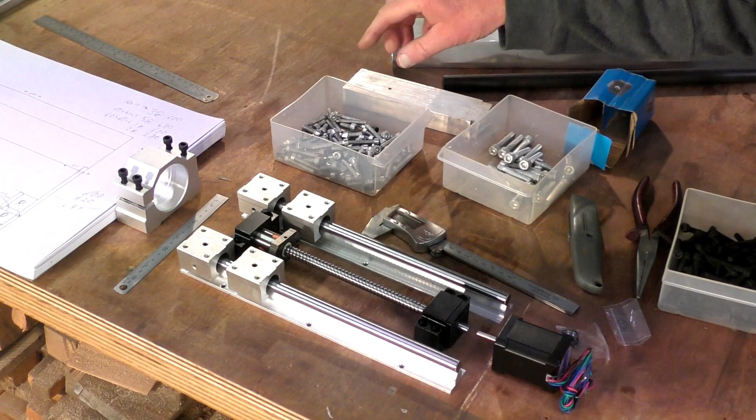Hello there, I've made a bit of a start on the MIDI, which stands for mid-size, mid-duty CNC router. And what I've actually done is I've laid some parts out here. So this particular set of parts is for the Z-axis.

So what I had to work out was what was the clearance that was necessary between these bearing carriages and this bearing block, and how much area I had to create around this to make it work without anything fouling, which gives me the distance between the outer part of the rail here and the outer part of the rail here, and how much room I've got on the aluminium plate material that I picked up yesterday.

It is 160 millimeters. So I'm going to set this top edge to the top edge of that aluminium plate, and with the clearance that I have here, it gives me just a little over 30 millimeters here. So it gives me an area where I can make a solid attachment between the left side and the right side of the CNC router, because I'm having a drive screw on both sides of the Y-axis.

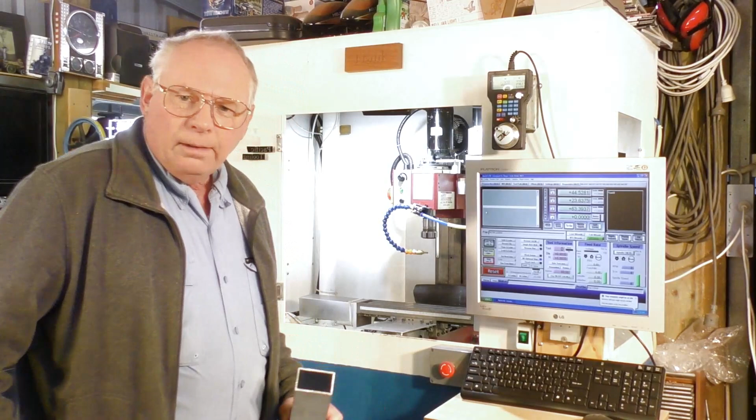Right, so I've cleaned all the ends of these up and I've cut all those short lengths of 20mm bright mild steel. Now all I've got to do is write a small program to cut this 20mm hole with my little CNC mill that I converted about 3 years ago, and there's some 15 videos on how I converted this from a manual mill to a CNC mill in every detail.

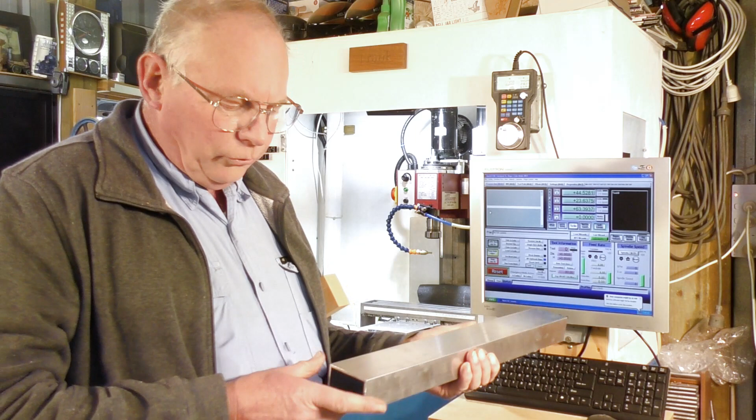So what I'm going to do, like I say, I'm going to write a short little program of how to machine the hole in here. I'm going to cut it with probably a 6mm 2 flute for this little job, for a number of reasons. I don't have to put so much downward pressure on the bit to get it to bite in and cut.

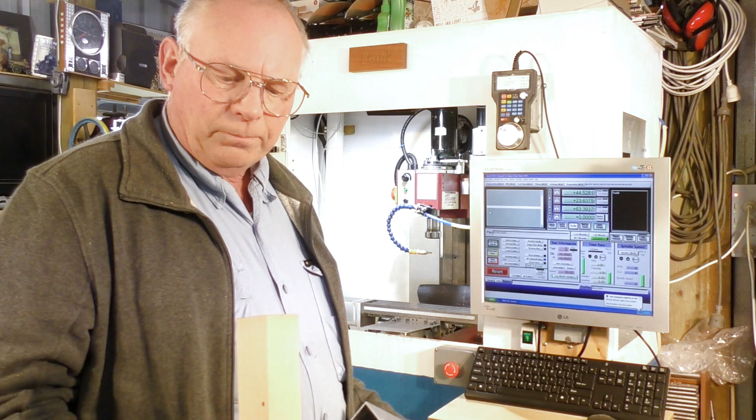And because this is a 3mm wall, what I've actually done is I've cut a piece of, what is this? I know it's wood. This is actually a piece of Oregon. Beautiful. It smells a little bit like oranges. Okay, so I've cut it the exact same size as this, so I just fit it in there like that.

Okay, now I'm going to make a jig. Now a jig is anything that you set up to do, you know, sort of repetitive work. So you just put it into the same place all the time. So it's a tool to help you do that.

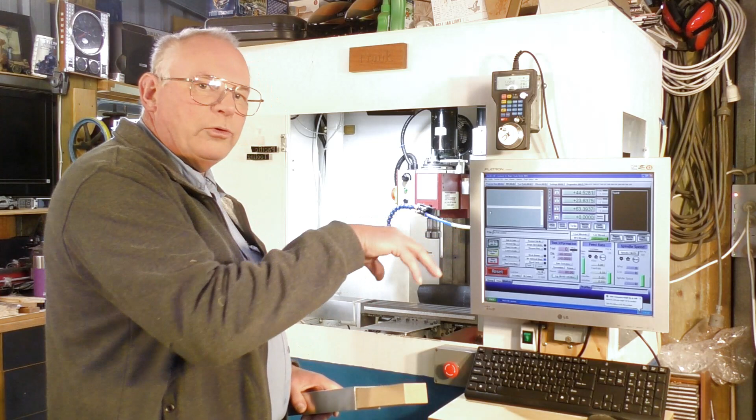Okay, so I put this in here, so when I've got this clamped onto the bed and the tool comes down in, it doesn't crush this down. It's got some resistance. Being aluminium, it will tend to bow slightly. So you put something in here like this to stop that bowing. The tool will bite in and cut the hole through, no problem at all.

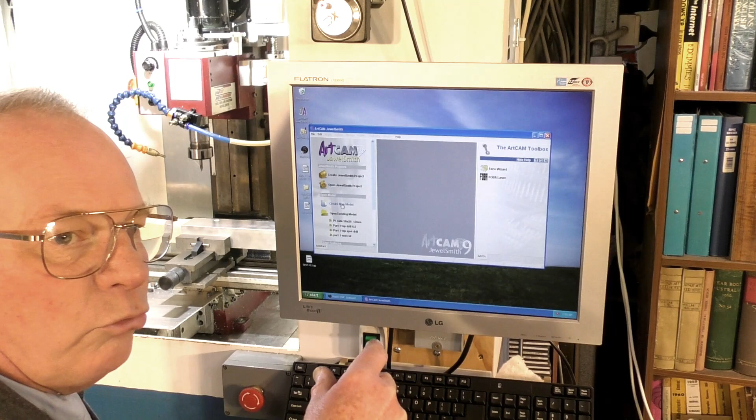That's the idea anyway. Okay, so now it comes down to writing the program in ArtCAM. Now, this is a program I started off with way back in 2008, I think it was, and it's still a good program. And the computer that is running this machine is an XP, actually, that I've revamped, I suppose, and it works perfectly. So we're going to start off with a new job,

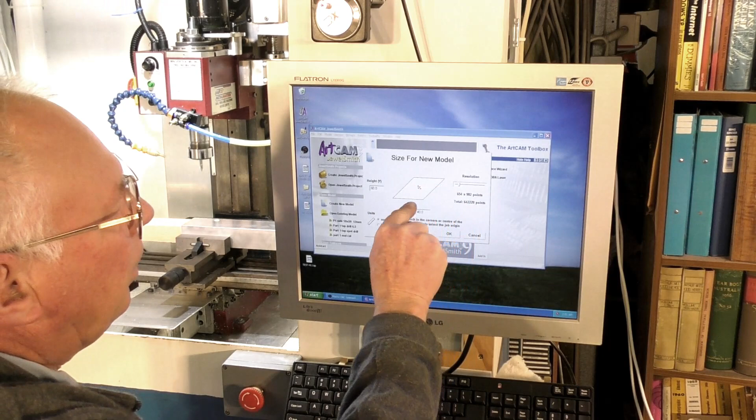and in our case it's going to be, in the Y it's 60mm, and in the X it's going to be 40mm. Now why I've chosen that is because I just want to work on the very end and I require a hole to be in the middle of this piece of work.

So let me just get the piece of material. So I want to put a mill hole just there like that. And the center of that hole is 20mm in from the end. Okay, so I'm actually tricking the program into thinking that this is the full size of the piece of material, because we're really interested in making that hole there.

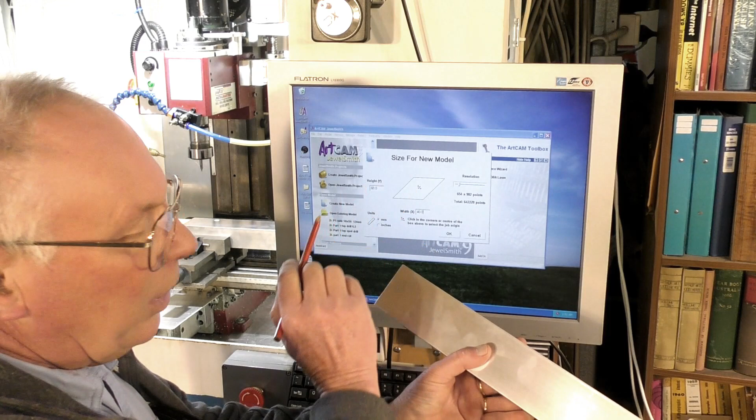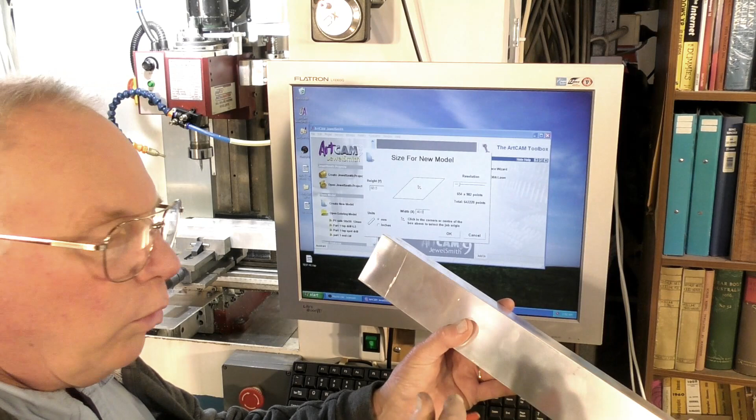Now the orientation at the moment is in the center of the material there. Well, I'm going to put it over here, this back corner, because the vice jaw is here, and I'm lining this corner up here with the end of the vice jaw, so I can reproduce the position of the material very easily. You'll get to know what I mean when we start machining.

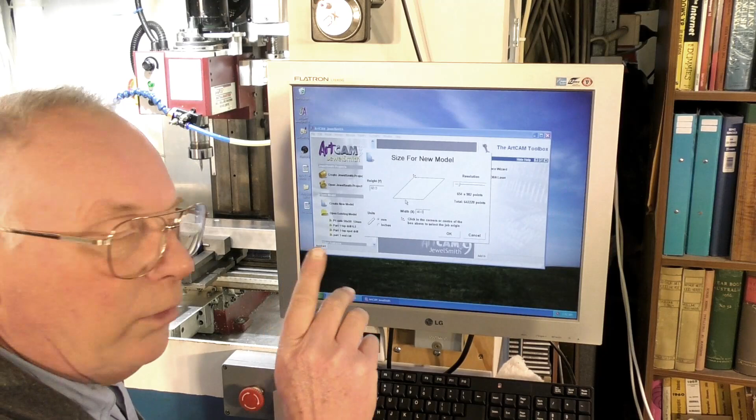So we're going to alter this to the back corner over here, which is pretty normal for a CNC mill. CNC router, you either use this front corner here or the center. CNC mill, it's back corner over there. You can put it anywhere really, but that's what is normal for a CNC mill.

So I'm going to zoom you into full screen, or as big as I can get, so you can see what I do to write the program. Whatever's missing off the screen down here doesn't really matter. Okay, so there is our material. So we're going to come here to the drawing tools, pick a circle,

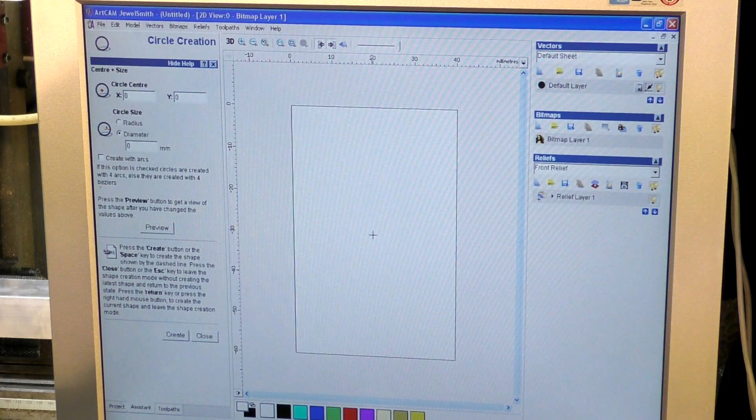and we are going to say that we want a circle of, now I can actually use the wizard here to do this, so it's exactly right. Diameter, we need it to be 20mm. Ooh, not that many. 20mm. And we need this to be, let me see, if we put the 0, 0 here, we need to be minus 30, oh no, there we go, minus 30

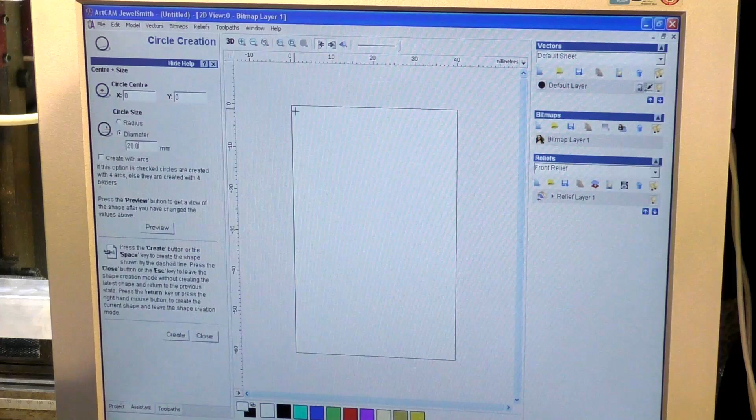and plus 20. So that's what we're going to say here. This is plus 20. And this one minus 30. Preview. And now that's how to use the wizard to help you accurately position a hole or whatever you want to do.

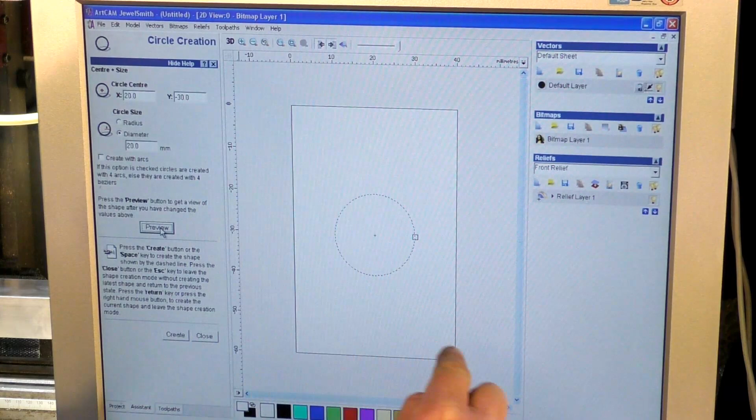Now that is dead in the center of that material. I didn't have to draw it or anything like that. So we're going to say create and close.

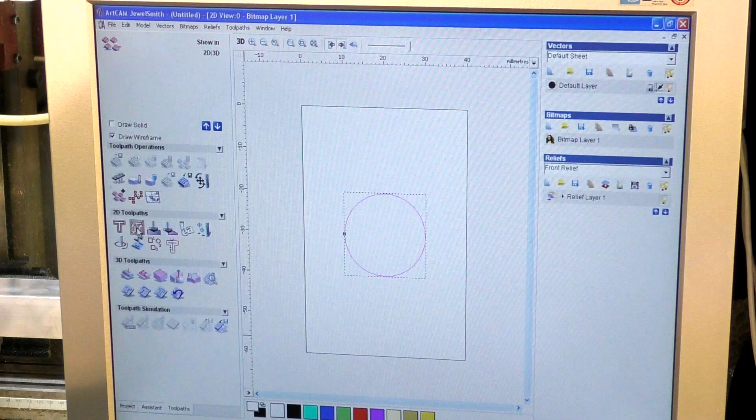Okay, so now we're going to create a toolpath. Make sure we've got our hole selected, and we come down here to toolpaths, and we just want a simple area clearance. So it's a 2D area clearance, start depth 0, and we're going to make the 0 the top of the material, which is fine. Finish depth, we're going to go 4mm, I think, yeah, 4mm. We're not worried about allowance or final tool allowance or anything like that.

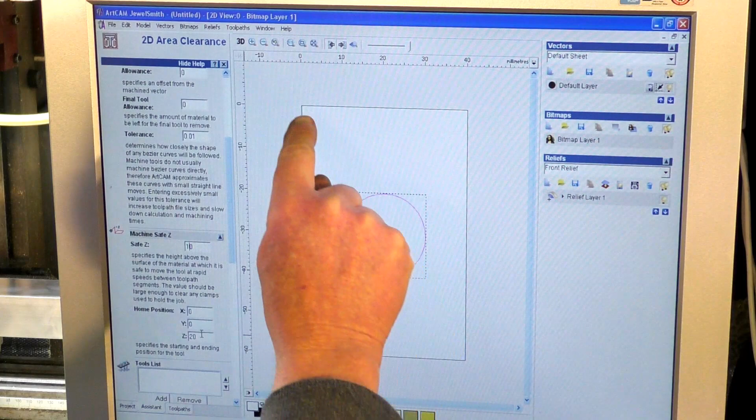Machine safe, oh, that's probably a little bit too much. We can go 10 mil here. Home position Z. Okay, so that means the machine's going to go back to this corner here, which I wanted out the way because I want to be able to undo the vise, take this out, turn it over without having to muck around trying to get it underneath the tool if it was in the middle here. So this is correct for our home position. 20 mil out the way. Safe, yeah, that'll be fine.

Tool list. Add a tool. 6mm end mill. And we're going to select that. Now we're going to modify this now to suit us. 1.8. It's probably okay. I'm going to go 1.5. I'll say 1.5. I don't want to put it under any stress. Step over, step down. Oh, that's way too much. So we're going to go, I think 0.75 is fine.

Feed rate 20 millimeters per second. Yeah, I'll run with that because I can slow it up in Mach3. Plunge rate 6 millimeters a second. I'll say 5. 15,000 RPM? No. I know the maximum on this is about 4,000 RPM. Although, look, the program is not actually controlling this on this machine. I control it manually, but just for practice sake, we'll put the correct information in here.

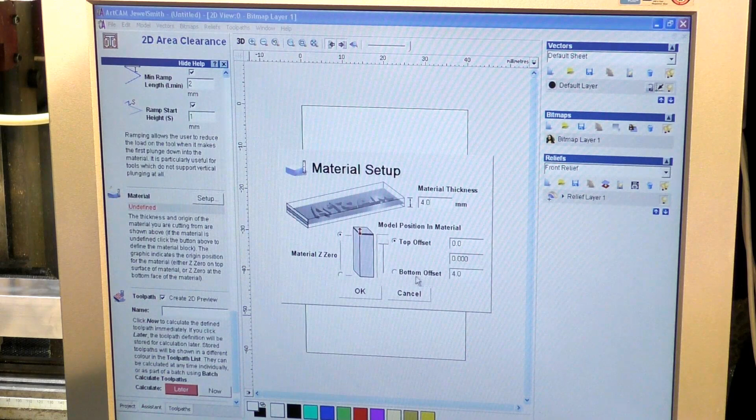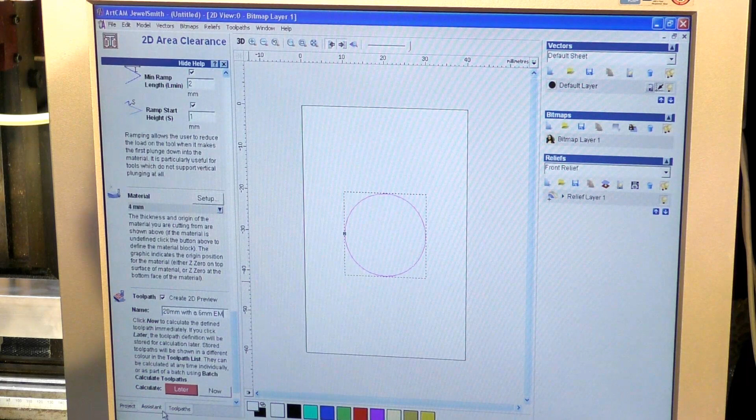Now let's set the material setup. We're going to say it's 4 millimeters. Yeah, 4.0 millimeters thick. Top offset 0 at the top, and we're going to OK that. Okay, so we'll call it something so we can recognize it. So we're going to say 20 millimeter with a 6 millimeter. Oops, that was wrong. Okay, we'll calculate it now, and there it is. And that's it.

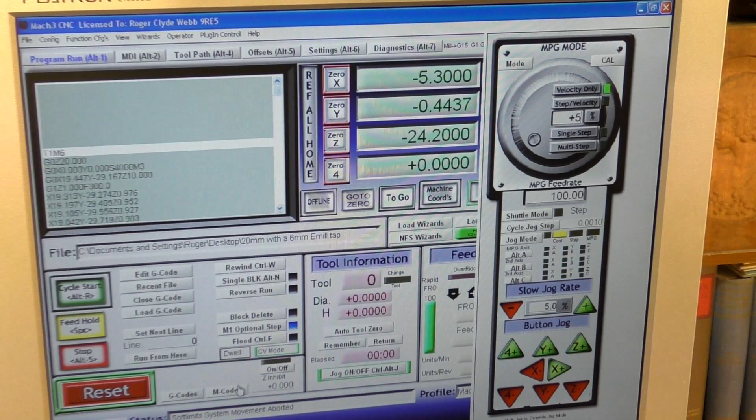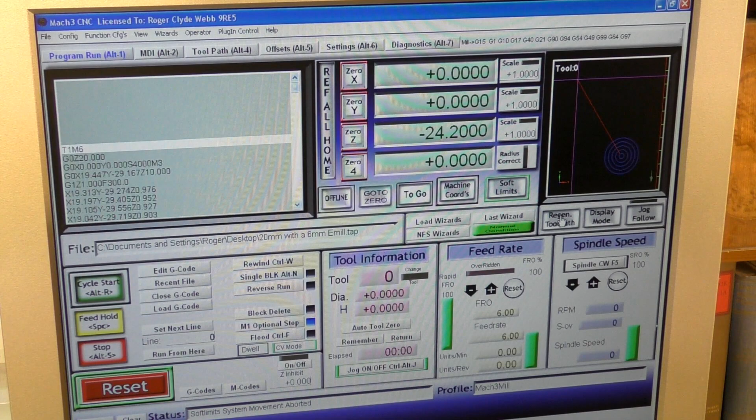Okay, so let me see. Bring the tool down. Actually, this is just a tool I've got in here just to find that edge, that corner there. Nice pointy tool. Okay, so we'll get rid of the MPG. So we're coming up here. All we're interested in is the X and Y, so we're going to zero that and zero that. And regen. Okay, so that puts it in the right position for us. And so now I'm going to change that tool and we'll zero the Z.

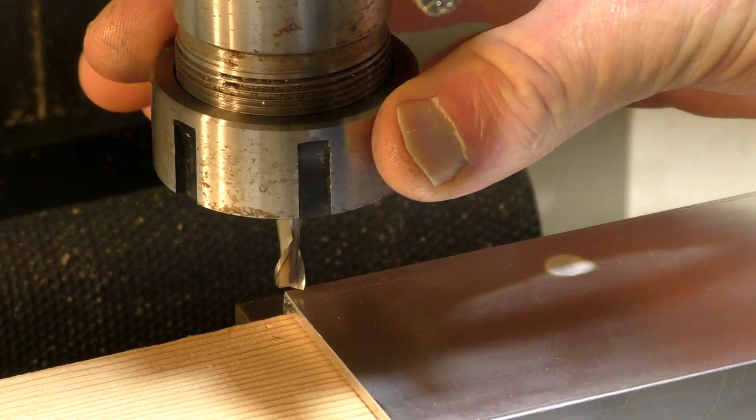Okay, so we've got a 6mm cutter in there now, and we're just going to bring down the cutter and we'll slow that up a bit. Okay, 3% should be fine. And what I'm going to do is just scratch that. Nearly there. There you go, just scratching that, I think. Yep, there we go. So we're going to call that 0. Okay, so we're ready to go.

Like I said earlier, the spindle on this is manual. We're going to be using flood coolant as well, because this is aluminium and you require it with aluminium. So we'll start the spindle up and we'll set it all in motion.